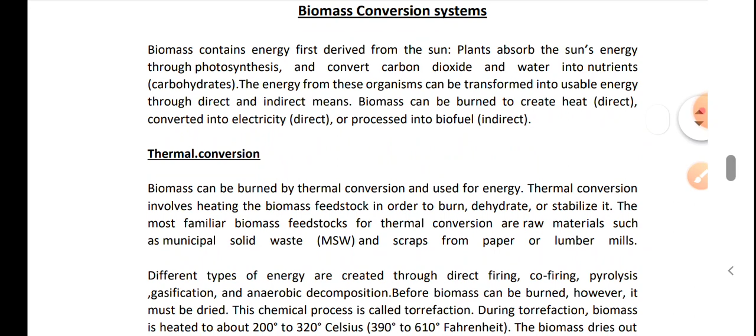So first we will discuss the thermal conversion. There are so many kinds of thermal conversions of biomass. The biomass can be burned by thermal conversion and utilizes the heat energy.

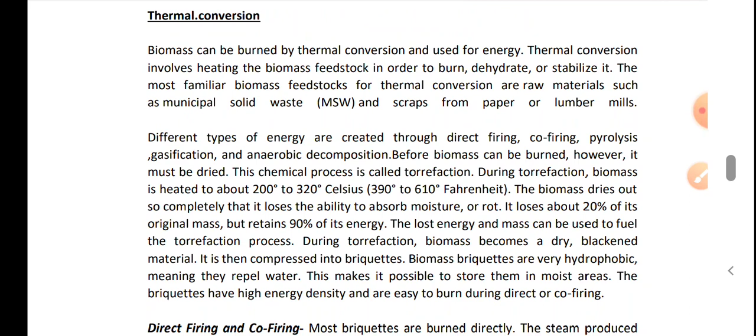In thermal conversion, the biomass feedstock is heated to burn, dehydrate, or stabilize. The most familiar biomass feedstocks are raw materials such as MSW, which is municipal solid waste, and the scraps from the paper mills or lumber mills.

Different types of energy are created through the direct firing, co-firing, another process that is pyrolysis, gasification is another process, and anaerobic decomposition.

Before the biomass can be burned, the important thing is it must be dried. So it is chemically done, and the process involved in it is called torrefaction. During torrefaction, biomass is heated to around 200 to 320 degrees Celsius and it dries out so completely that it loses the ability to absorb moisture.

In this process, actually it loses around 20% of its original mass, but it retains 90% of its energy. During torrefaction, biomass becomes a dry, blackened material that is then compressed into briquettes. These briquettes are hydrophobic, it means they repel the water. This makes it possible to store them very easily in even moist areas.

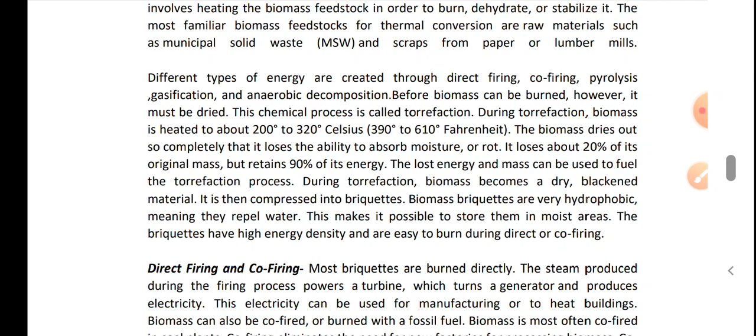These briquettes have high energy density and are very easy to burn during the direct firing or in the process of co-firing. So what is actually the direct firing and co-firing? Direct firing is the process in which the biomass briquettes are directly burnt, produce steam, and run a turbine, which in turn generate electrical energy. This electrical energy can be utilized for any purpose, whether it is manufacturing or heating a building.

Biomass can also be co-fired. Actually, most often it is co-fired, and it can be co-fired with fossil fuel very easily. In thermal power plants, the biomass is used and it is fired along with the coal.

Actually, co-firing eliminates the need for new installments, new factories to process the biomass, and also co-firing eases the demand for coal, which is also a factor. That is why we can say that co-firing is a better way to do the thermal process.

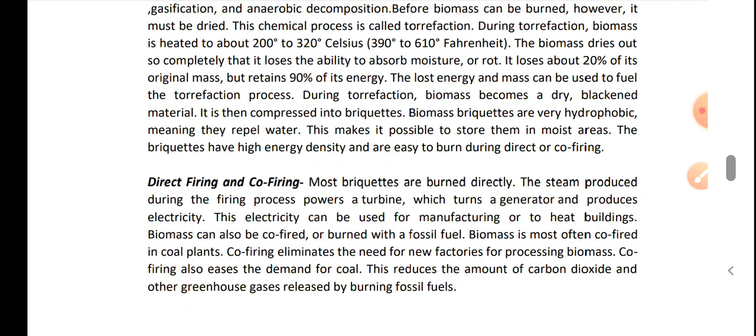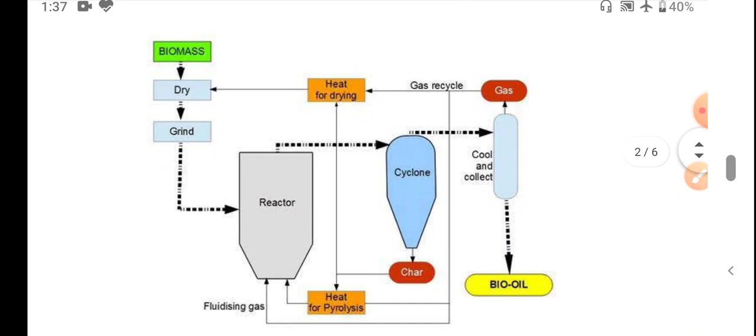Now I am showing you this diagram again. Here a cyclone is there, you can see it here. From the reactor, the biogas material, after processing and heating, goes into the cyclone where dust particles etc. are removed, and the gas is collected here, while bio oil is obtained in this container.

First we have to understand what is pyrolysis. Pyrolysis is a related method of heating the biomass. Simply, during pyrolysis, biomass is heated to around 200 to 300 degrees centigrade in the reactor without the presence of oxygen, which is important. This keeps it from combusting and causes the biomass to be chemically altered.

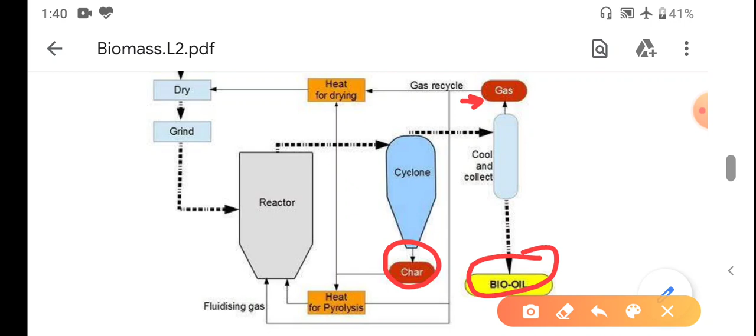Pyrolysis oil, sometimes called bio-oil or biocrude, is a type of tar. It can be combusted to generate electricity and is also used as a component in other fuels and plastics.

Syngas, or synthetic gas, can be converted into fuel such as synthetic natural gas, and it can also be converted into methane and used as a replacement for natural gas. It can also be very useful because it has a very high efficiency of combustion.

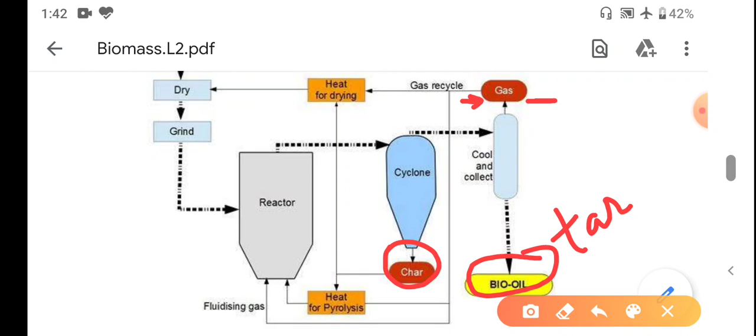Biochar is a type of charcoal. It is a carbon rich solid that is particularly useful in agricultural processes. It enriches the soil and prevents it from leaching pesticides and other nutrients into runoff. It is also an excellent carbon sink. Carbon sinks are reservoirs for carbon containing chemicals, including greenhouse gases.

So in this diagram, we have seen how the pyrolysis occurs and what products we obtain in the process of pyrolysis from biomass. We obtain syngas, synthetic gas, and we obtain bio oil, as well as biochar.

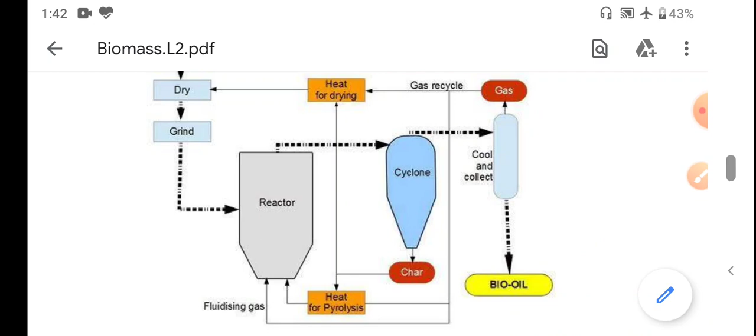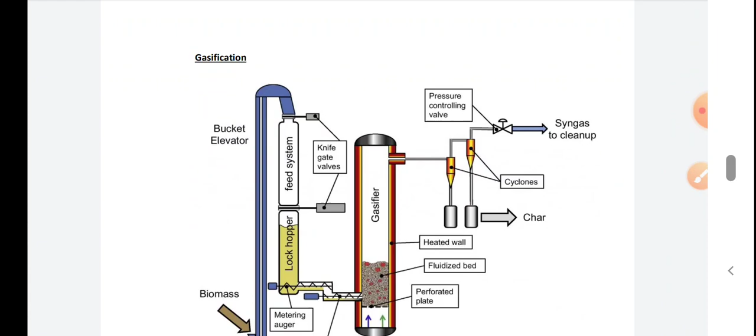Now next we will discuss another process of biomass conversion, that is gasification. We can say that biomass can also be directly converted to energy through gasification. During the gasification process, a biomass feedstock, which is actually MSW, meaning municipal solid waste, is heated to more than 700 degrees centigrade with a controlled amount of oxygen.

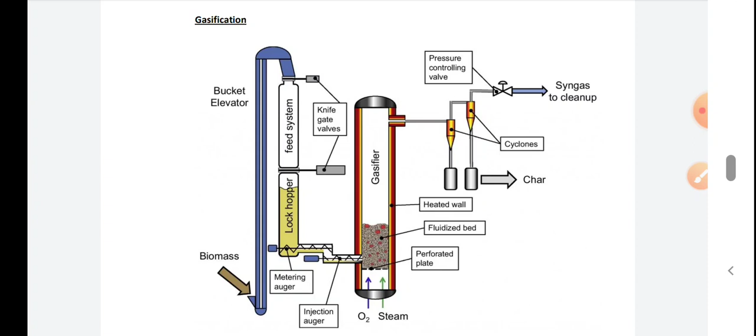You can see it here, this is the gasifier. The molecules of the biomass feedstock break down and produce syngas and slag, syngas being a combination of hydrogen and carbon monoxide.

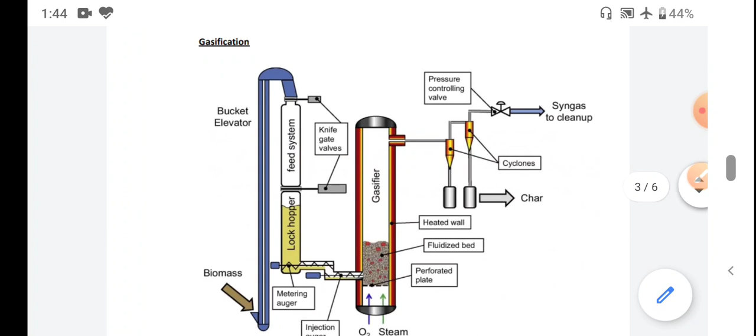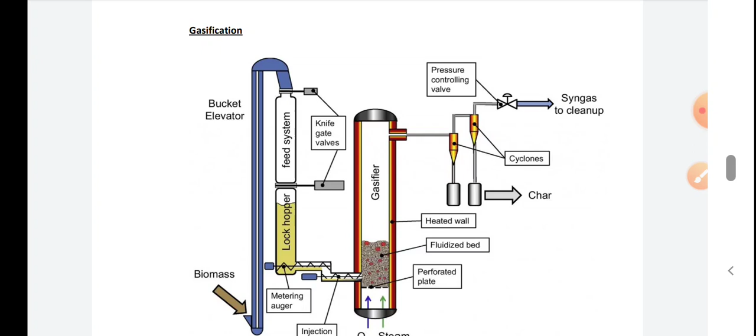In this diagram, during gasification, syngas is cleaned of sulfur particulates, mercury and other pollutants. The clean syngas can be combusted for electricity or processed into transportation biofuels, even fertilizers. The slag which we obtain forms as a glassy molten liquid. It can be used to make cement or asphalt.

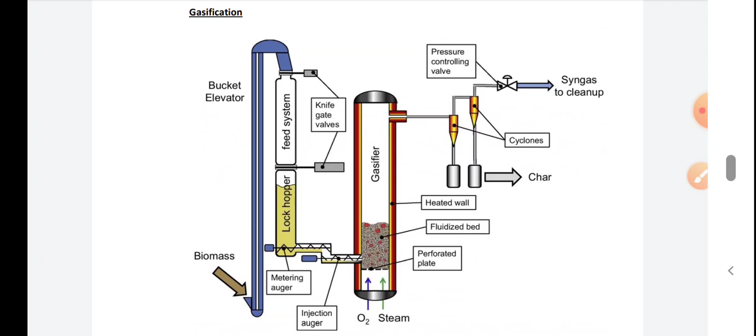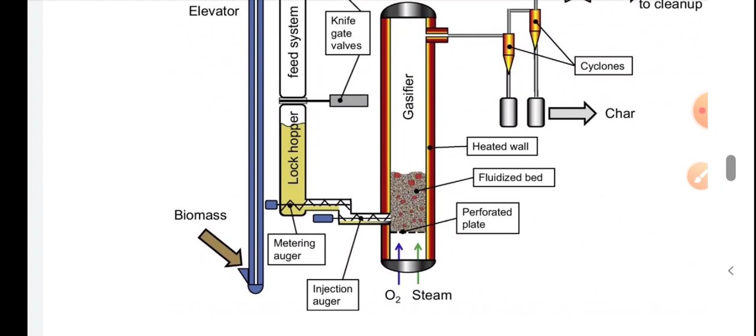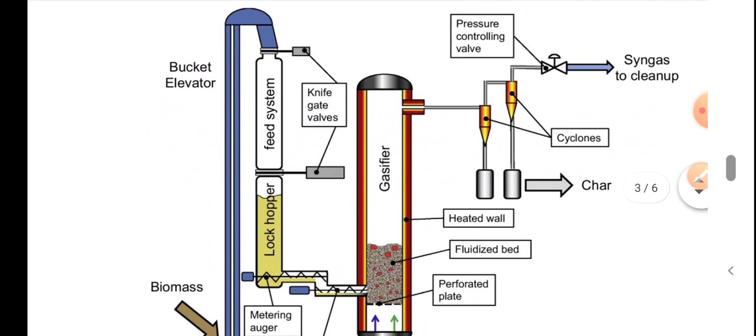Industrial gasification plants are being built all over the world, and you can easily see all these things in this diagram. Biomass is put here first, and then through the bucket elevator it goes into the feed system.

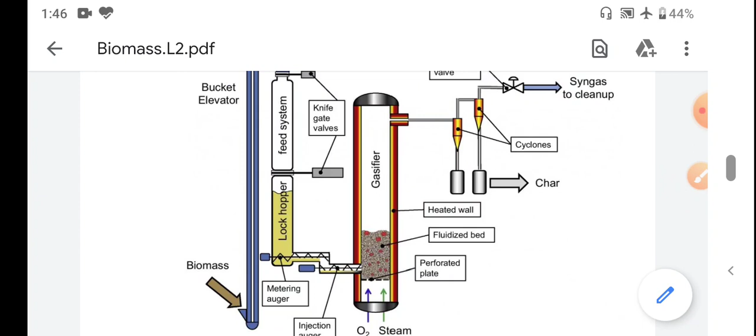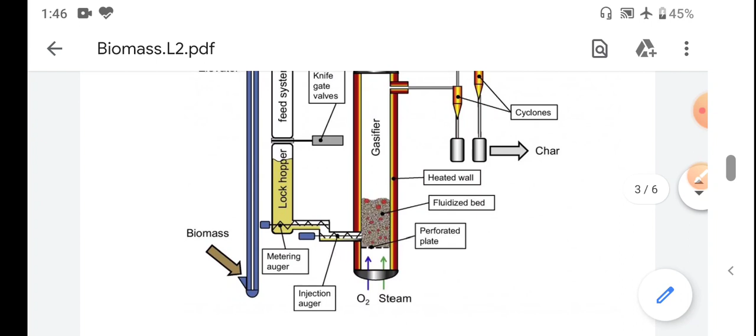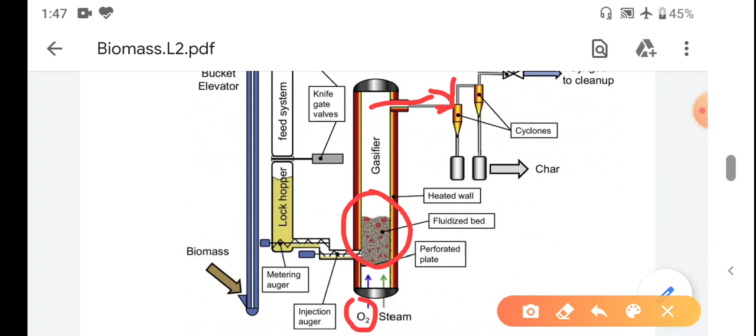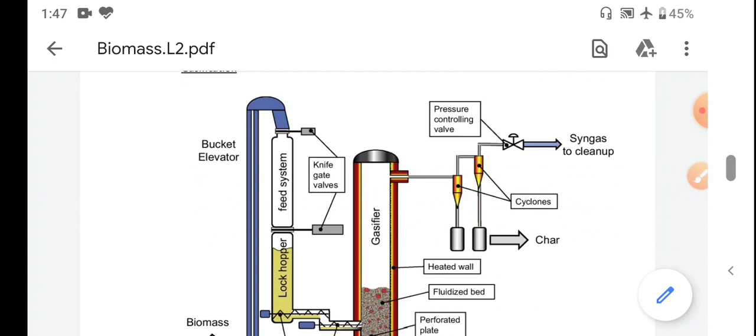From there it is put into the hopper, and through an injection system it is put into the gasifier, where it is heated up to 700 degrees centigrade in the presence of controlled oxygen. The gaseous material obtained here is put into cyclones, which are used to separate the syngas and the char. So in this process we obtain the syngas directly.

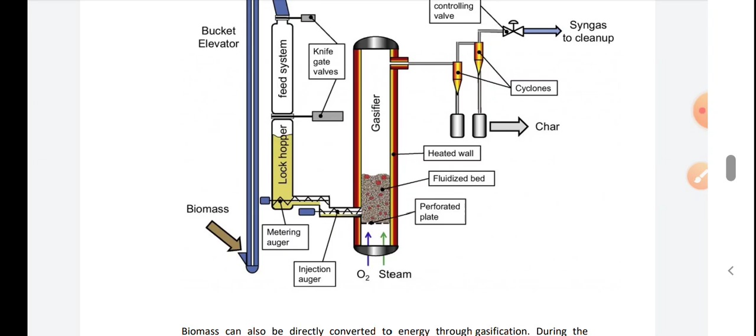The next biomass conversion system is anaerobic decomposition. In this process, bacteria break down the material in the absence of oxygen. This is a very important process in landfills, where the biomass is crushed and compressed to create an anaerobic environment, meaning the oxygen amount is very low. In this environment it decays and produces methane, which is a very important source of energy.

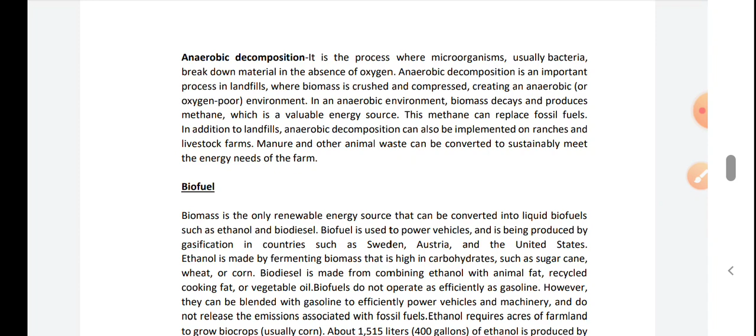Next process is biofuel. Biomass is said to be the only renewable energy source that can be converted into liquid biofuels such as ethanol and biodiesel. Biofuels are directly utilized, and also they can produce electricity, they can power vehicles, and these are produced by gasification in many countries.

Ethanol is made by fermenting biomass that is high in carbohydrates, such as sugarcane biomass, wheat biomass, or corn biomass. Biodiesel is made by combining ethanol with animal fat or vegetable oil.

Biofuels do not operate as efficiently as gasoline. However, they can be blended with gasoline to effectively power vehicles and machines.

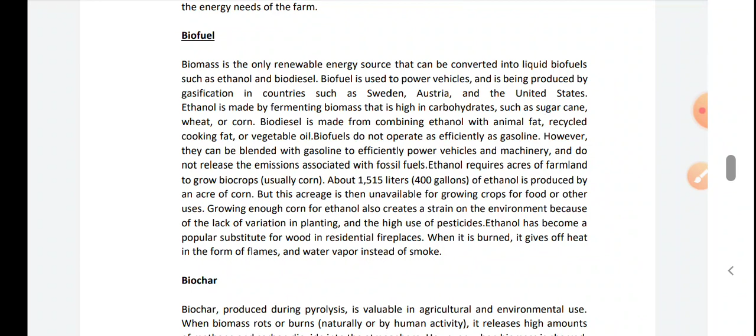Next is biochar. Biochar, which is mostly produced during the process of pyrolysis, is a very valuable product in agriculture.

When biomass rots or burns, it releases a high amount of methane and carbon dioxide into the atmosphere. However, when biomass is charred, it sequesters or stores its carbon content. When biochar is added back to the soil, it can continue to absorb carbon and form large underground stores of sequestered carbon.

So we can say that biochar can be a carbon sink that can lead to negative carbon emissions and healthier soil. It also helps enrich the soil. It is porous, so when added back to the soil, it absorbs and retains water and other nutrients.

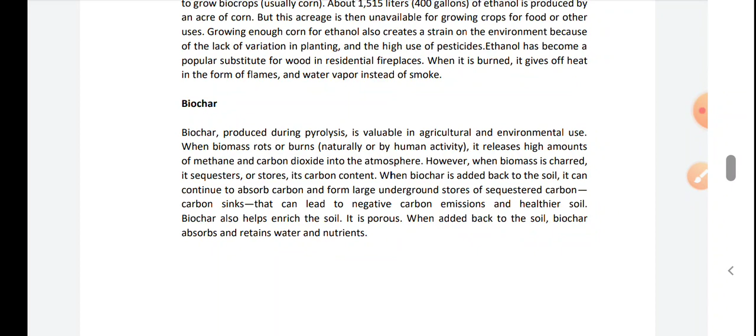Also, we can study black liquor, hydrogen fuel cells, and algal fuel produced through biomass. What is black liquor? When wood is processed into paper, it produces a high energy toxic substance which is called black liquor.

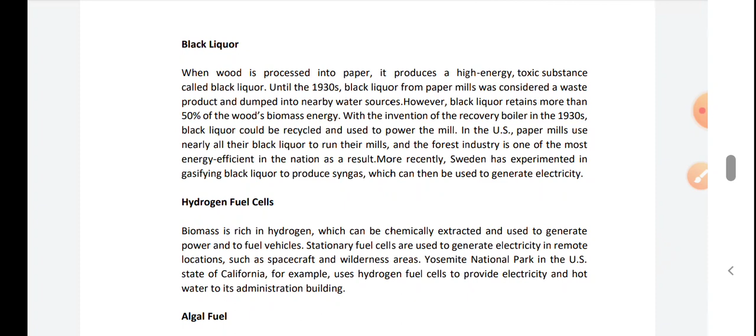Hydrogen fuel cells: biomass is rich in hydrogen, which can be chemically extracted and used to generate power and fuel vehicles using hydrogen fuel cells. Stationary fuel cells are used to generate electricity in remote locations where no other source of electricity generation can be installed, such as in spacecraft and wilderness areas. We can use hydrogen fuel cells to generate electrical energy.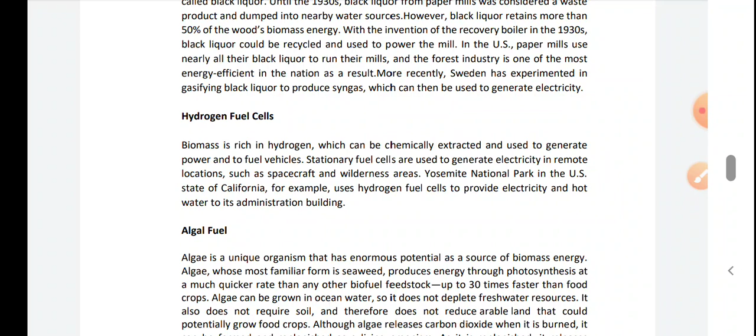And algal fuel. Algae is a unique organism that has enormous potential as a source of biomass energy. Its most familiar form is seaweed, which produces energy through photosynthesis at a much quicker rate than any other biofuel feedstock.

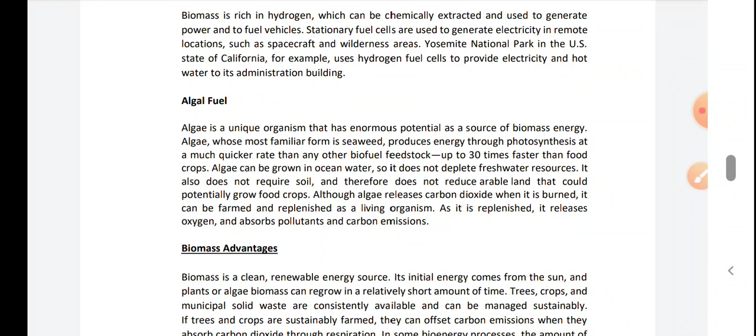Algae can be grown in ocean water, so it does not deplete freshwater resources. It also does not require soil and therefore does not reduce arable land that could potentially grow food crops. So we can say that algal fuel is a very important fuel obtained from biomass.

There are so many advantages biomass has. It is a very clean, renewable energy source. Since its initial energy comes from the sun, and plants, algae, etc. can regrow, biomass will always exist in nature.

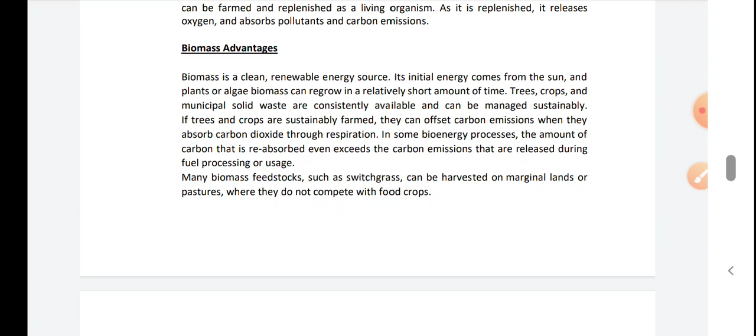So many biomass feedstocks, such as switchgrass, can be harvested on marginal lands where they do not compete with food crops. So we can say it has so many advantages, and since biomass is present in nature everywhere, we can utilize it to produce electrical energy, as well as produce other products like synthetic gas, methane, char, biodiesel, etc.

We can also discuss some of the limitations biomass has. If biomass feedstocks are not replenished as quickly as they are used, they can become non-renewable. A forest, for example, can take hundreds of years to re-establish itself.

So if we just use it without replenishing it, it will decay at a very faster rate, and potentially it will not be a renewable source.

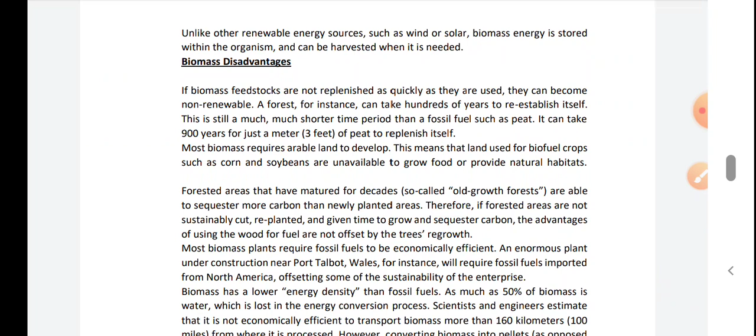Also, burning biomass releases carbon monoxide, carbon dioxide, nitrogen oxides, and other toxic elements which can pollute our environment, along with particulates. If these pollutants are not filtered and recycled, burning biomass may create smog and even exceed the pollutants released by fossil fuels in thermal power plants.

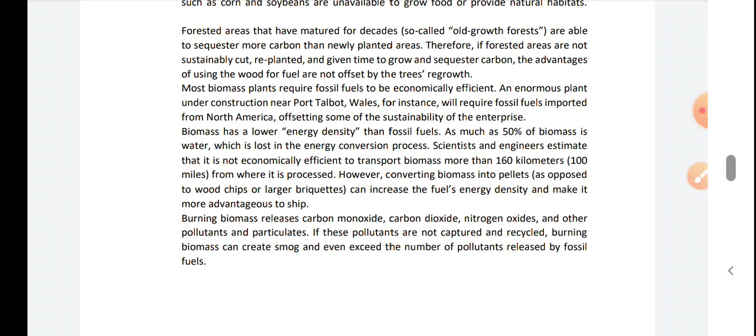So these are a few limitations of biomass, but still, since biomass is a very good source of energy from which we can obtain many products through biomass conversion processes, it's a very unique kind of renewable energy source.